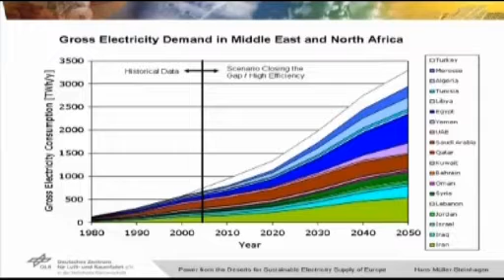Let's start with Middle East and North Africa. Don't even try to read the different countries, but believe me, we have done it for all of them. The important message is that electricity demand in the MENA countries will increase by a factor of 5 to 6 over the next 50 years, reaching roughly the level of electricity consumption Europe has already now. This is because of increase in population, but also increase of industrial activities and increase in the quality of life.

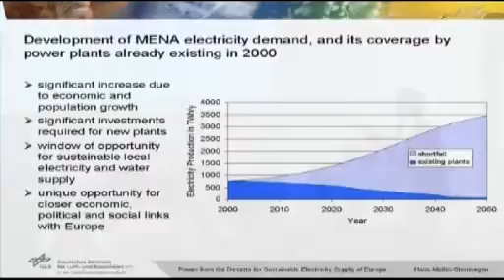Now, if we look at this, this is the same plot. That's the increase, and this is the capacity which can be produced by the existing power plants in 2000. These power plants will go out of operation over the next 30 years because of old age, and you see there's a tremendous gap that has to be fulfilled. That means there's a tremendous need to build new power plants in the Middle East and North Africa. This means investments, but also a potential to restructure the electricity market and to form closer economic, political, and social links with Europe.

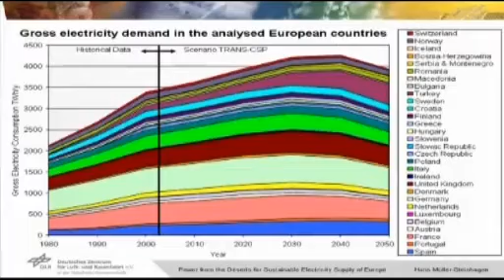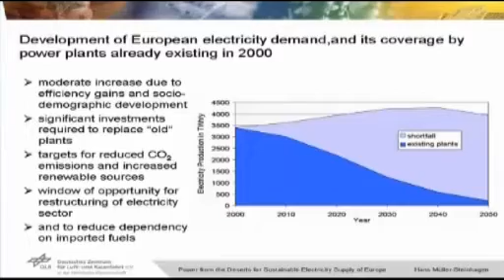Now, we could, of course, say well, this is not too bad, we will manage with this amount of electricity or increase in electricity generation. But this is not the case, because if we look at our present electricity production capacity, this is the dark blue area, then we see that in Europe we will have to replace roughly 60% of our existing power plants over the next 20 years because they just have reached the end of their economic and technical lifetime. So again, there is a tremendous need to build new power plants. In addition to this, we have our targets to reach the reduction of CO2 emissions, to increase the percentage of renewables in our complete electricity mix, and of course, to reduce our dependency on imported fuels.

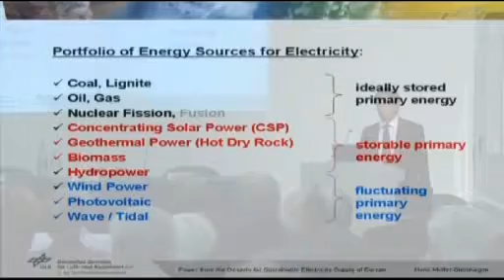So both areas, MENA and Europe, have to build a huge capacity of power plants, and the question is now, what power plants will this be, and how can we position this important area for the years to come? We looked at the whole portfolio of energy sources for production of electricity - here the conventional technologies. We didn't look at fusion because fusion power will, if ever, only become economically relevant later than 2050. We went up to 2050 in our scenarios and not further.

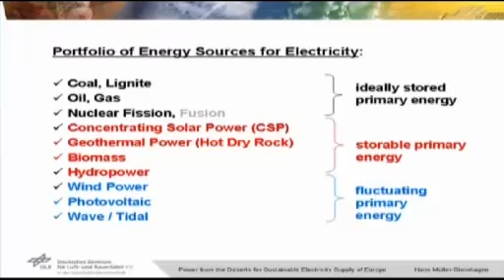We looked then at the storable renewables, and we looked at the fluctuating renewables like wind, photovoltaic, wave, and tidal. For each energy carrier and energy technology, we made a sustainability assessment and said they have to qualify in terms of affordability, security of supply, and compatibility. And if two technologies were equal in terms of availability and cost, then we always gave preference to the one which is more sustainable.

Now, if we look at our energy scenario, I don't think there is any doubt that we have to increase the percentage of renewable energies in the future. Even if there are discussions on the rate of doing this, on the other alternative technologies, I don't think there are many governments who would debate the need to increase the percentage of renewables. So we did an analysis with a 10 square kilometer resolution, 30 minutes over the whole year, on the potential of different renewables such as biomass, geothermal energy, wind, hydropower, and solar for Europe and for the MENA region.

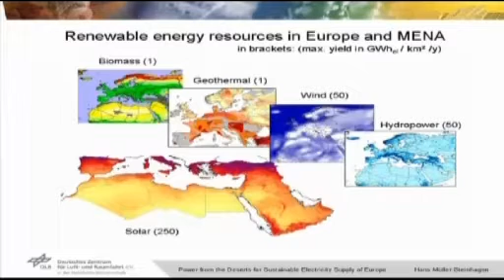As you can see, just for an example, wind has more potential where the blue is dark, so around England, of course, and in the coastal areas there is a significant potential for wind. You also get a fairly high energy density in terms of gigawatt hours electricity per year and square kilometers. Similar for biomass - there's, of course, in the Sahara Desert, no biomass, there's a lot more in Central Europe, and so on. And then we have solar energy, which has, surprisingly, the highest energy density of all renewables.

We then calculated from all the different forms of energy the economic renewable potential to generate electricity. The economic renewable potential means that within 30 to 40 years, at a given location, this electricity must be competitive with other forms like fossil fuels and electricity from fossil fuels. That will be different, for example, for solar in England than it would be in the Sahara Desert.

But we did this separately for every location, and we then looked at the demand on electricity. In the year 2000 it was 4,000 terawatt hours of electricity per year. This will be the demand of electricity in the year 2050. In EU and MENA, the doubling comes mainly from the Middle East and North Africa. And now we look at the economic potential of renewables.

Wind, biomass, geothermal, and hydropower together can deliver economically around 6,000 terawatt hours per year, so more than enough to supply present demand—75% of the demand in the year 2050.

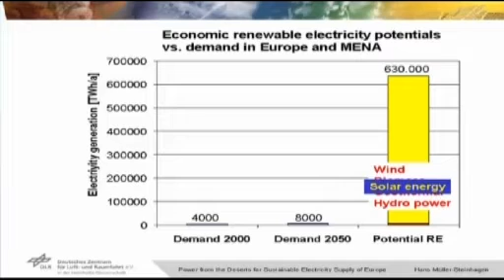Now, if we add solar to this, we see that the potential in Europe, Middle East, North Africa to generate economically electricity from renewables is about 150 times higher than the total electricity demand in Europe and MENA today, and still about 100 times higher than the future electricity demand.

Solar is by far the most abundant, and if we look at the size of an area which would be required for a gigantic solar thermal power plant which would supply the whole electricity of the world, this would be 1% of the Sahara Desert. Of course, nobody will build just one single gigantic power plant. That's not the idea. It's really just to show we are not talking about plastering the world with solar power plants, mirrors, photovoltaics, or whatever.

This is the area for the EU 25, about 150 by 150 kilometers square. And that would be the solar power plant for 100% German electricity supply.

Another example: if we would build a solar thermal power plant with the area of Lake Nasser, this would generate enough electricity—the same amount of energy as the whole oil production of the Middle East together.

Now, how is this electricity to be generated? We believe for these power plants in North Africa, the Middle East, and maybe Southern Europe, it will not be photovoltaics, which serves as decentralized electricity generation, but for these large power plants, it will be solar thermal power plants. Let me explain how they work and why I think they should be given preference for these applications, not for many others.

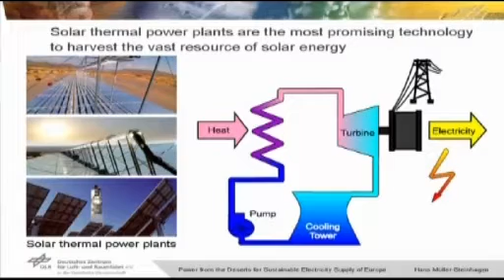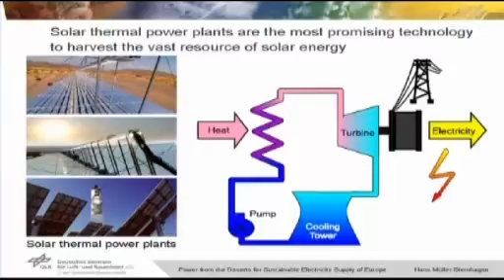And here we have the three main technologies. These are flat mirrors, a so-called Fresnel type of system, where the flat mirrors follow the sun during the day. We have these parabolic trough systems, which follow the sun from morning to night and focus the sunshine about 80 to 100 times on a horizontal absorber tube. And we have so-called power tower or solar tower systems, with almost flat mirrors following the sun and focusing it up to 1,000 times on the top of a tower, where you reach temperatures up to 1,000 degrees.

What's the advantage? First of all, these systems can be readily integrated into conventional thermal power plants, which we know well—companies already have a lot of expertise building conventional gas turbine and steam turbine power plants. It can be used to provide firm capacity, because you can combine it with heat storage and supply electricity even when the sun is not shining, or use a fossil backup, firing gas, coal, or oil when the sun is not shining. It can serve different markets like bulk power, remote power, but also desalination.

It already has the lowest cost of solar electricity, and the energy payback time—the time to generate as much electricity as the energy needed to build the plant in the first place—is only 6 to 12 months. And it's a proven technology with an industrial base.

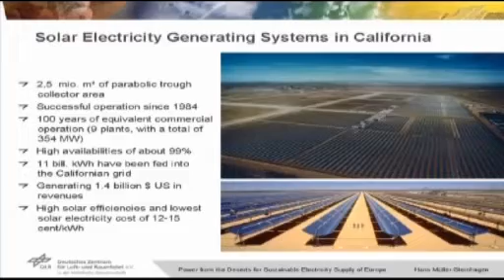These power plants are not new. About 25 years ago, 9 solar thermal power plants with a total capacity of 350 megawatts were built in the Californian Mojave Desert and have been operating since. They are still working. We checked some of their mirrors and absorber tubes just 3 years ago. There's no sign of wear or decrease in the reflectivity of the mirrors or the absorptivity of the tubes. These power plants have generated $1.4 billion US in revenues, have fed 11 billion kilowatt hours into the Californian grid.

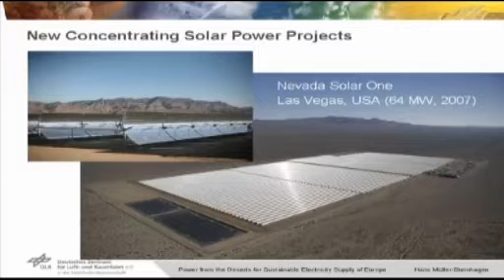and have now levelized electricity costs of around 12 to 15 cents per kilowatt hour. Since then, there have been new power plants which have been built and taken into operation. What you see here is a 64 megawatt power plant near Las Vegas, taken into operation in 2007.

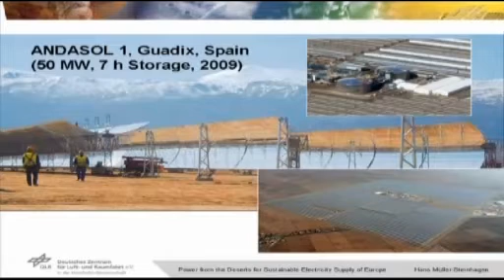One is just taken into operation. It's the 50 megawatt solar thermal power plant, a solar parabolic trough plant near Granada in Spain. The interesting thing here are these 2 big tanks, which are heat storage that allow this plant to operate for 7 hours after sunset, or whenever the sun is not shining, to bridge this gap. And with this, they have about 4,000 full load hours per year.

I have a small video. This is in German, I apologize for this, but I just wanted to show you some impressions from this power plant. It's about 2 square kilometers of area, 550,000 square meters of parabolic mirrors, and about 100 kilometers of absorber tubes. As you can see here, we are really talking large-scale engineering.

This is a lot of civil and mechanical engineering, and it's connected to a conventional power plant. Here we saw the two large tanks again, which act as heat storage.

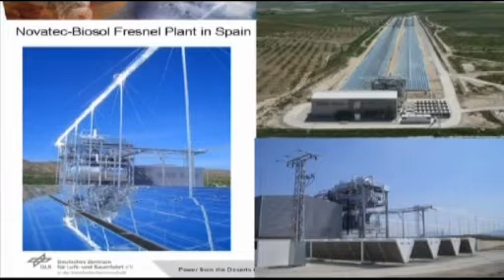This is another plant that has just gone into operation in Spain. It's a Fresnel plant with flat mirrors, and this one uses an air-cooled condenser, so it doesn't need cooling water at all. It's a very promising technology in terms of cost reduction, but it's still at a much smaller scale - only 1.5 megawatt.

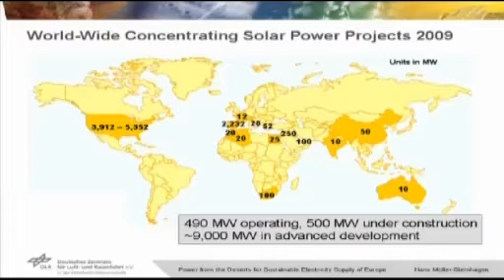And if we look at this worldwide, then we see it's on a much larger scale. There are about 5 gigawatts of capacity under advanced development in the US. There is some activity in Australia, South Africa, North Africa, China, India, and a lot, of course, in Spain, some in Italy and Greece as well. So in total, we have about 9,000 megawatts, or 9 gigawatts, of solar thermal power plants in the pipeline.

Reality will probably indicate that this increase will be much steeper, but I'm not going to do any calculations which give us a result where people could say he just assumes fossil fuel is getting exceedingly expensive.

The first solar thermal power plants in California were much more expensive than conventional electricity, but costs went down significantly, and then nothing happened for 20 years. Why? Because fossil fuel got so cheap that nobody was building any alternative technologies. I remember oil being less than $10 per barrel, and coal and gas similar.

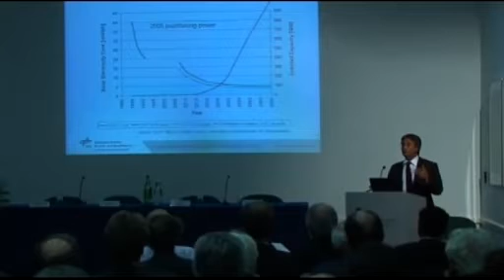Suddenly, all over the world, building activities started again, industry got interested, and the predictions from learning curves and from the relevant industry, the companies involved in building, planning, constructing these plants, are that roughly 10 to 15 years from now, this technology will be cost competitive with mid-load electricity from fossil fuels, including oil and coal if the CO2 is removed and stored underground.

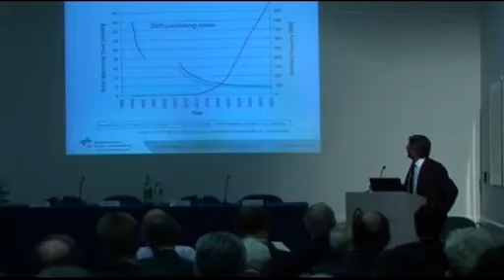Now what we have here is the capacity of installed plants, which is at the moment still very low. It's increasing - I've shown you the 10 gigawatt in the pipeline. But once this technology is less expensive than electricity from conventional plants, more and more of these solar thermal plants will be built, because the costs are predictable, and because the electricity is not getting more expensive - sunshine for the next 5 billion years will be available at no cost to everybody.

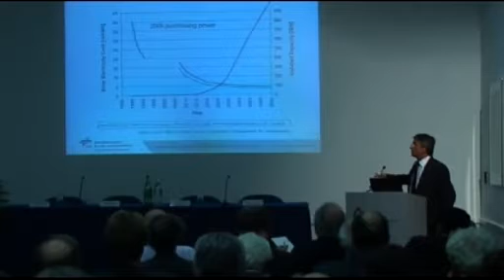And so this will mean that a lot of the new power plants which will have to be built will become solar thermal power plants in those areas where this is possible.

Why am I so confident that we will be able to get the cost down? This is a question I always get asked. The first reason is with increasing construction and building activities, we get a mass effect - mass production. More and more identical power plants will be built, not like now where every power plant is totally a first. The second is that these power plants will become bigger.

At the moment, the maximum size is around 50 megawatt, but in the US already, the Spanish company Abengoa has received an order for a 280 megawatt solar thermal power plant, meaning you only need one power block and you just have more mirrors around it.

But there's also a lot of technology development in the pipeline which has been developed over the past 20 years. The first is the so-called direct steam generation, where my institute and the Spanish research center CIEMAT have been working for the past 20 years.

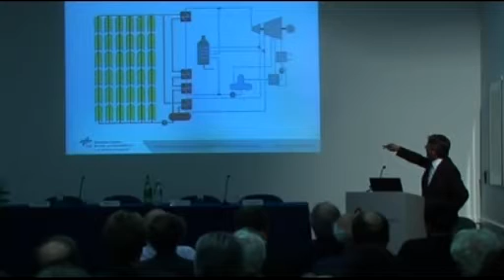Now this is a typical parabolic trough plant. We have oil as a heat transfer medium. The oil is pumped through the horizontal pipes, the absorber tubes, which are based in the focus of these parabolic mirrors, and it's heated from say 300 degrees to 400 degrees, and then this hot oil is used in steam generators to heat water to boiling temperature, evaporate it, superheat it, and then pass it through a two-stage steam turbine, the condenser again, and so on.

Now the next step will be to replace the heat transfer oil by water and evaporate the water directly in the absorber tubes. As you can see here, we save a lot of hardware, we save the steam generators, and we can go to higher temperatures because the oil is limited to about 400 degrees, even though it's a synthetic oil which costs a fortune.

Now this sounds simple, it's not. And Geoff Hewitt will agree with me - having two-phase flow through about 100 parallel channels, each channel being 800 meters long, and to control this and come out here with superheated steam, even if a cloud comes across it, is not trivial. We have pilot facilities in Spain.

We have had about 15 PhD theses. We can do this now. We can control it. We can predict it. And we are now in the process of setting up a pilot facility with 3 to 5 of these parallel streams, each of them being 2 megawatt thermal, to demonstrate that this works, and then it's ready for installation. This will reduce the investment cost or the electricity generating cost by roughly 15%, just because of the higher temperature and the less hardware.

That's one thing. The next thing is solar gas turbine, steam turbine cycles.

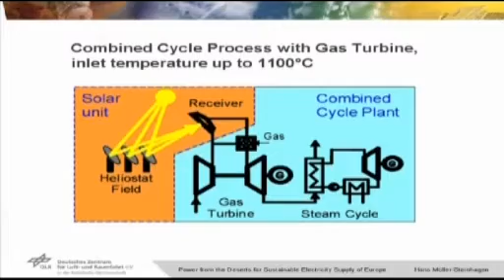Probably all of you or most of you would know that the highest-efficiency conventional power plant cycle is a combined cycle plant, where we have a gas turbine and the air is compressed, heated to 1,000 degrees by burning gas, then expands in the turbine, drives the generator, and the hot exhaust gas is used to raise steam, which is then expanded in a steam turbine to raise electricity.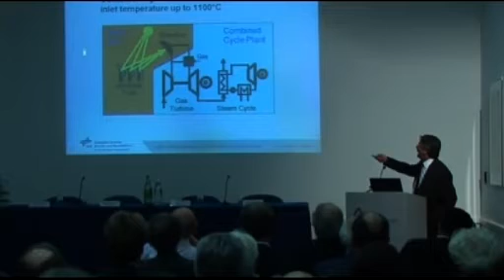Now the same cycle can be realized with a solar power plant where we have a solar tower and the heliostats, and we use solar energy instead of gas, or together with gas if the sun is not shining, to drive the gas turbine. And that gives us efficiencies of up to 35%, meaning we need less mirrors, which make 40% of the investment cost, for the same amount of electricity. And again, this has been developed and demonstrated in the last 10 years.

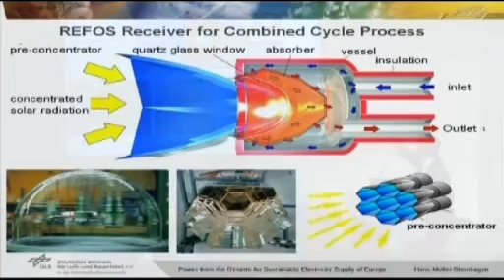What you see here is one single absorber which would be sitting on top of a tower. This is only for about 400 kilowatts. There will be many of those, and the air comes in here under pressure, moves here through a ceramic sponge, is heated to up to 1,000 degrees, and leaves then here with 5 to 10 bar pressure and 1,000 degrees to go into the gas turbine. And there are a few tricky bits like this glass here, which can only take up to 600 degrees, even though we reach 1,000 back here.

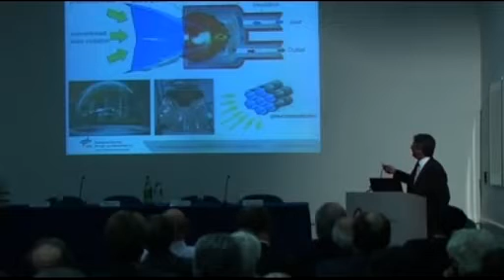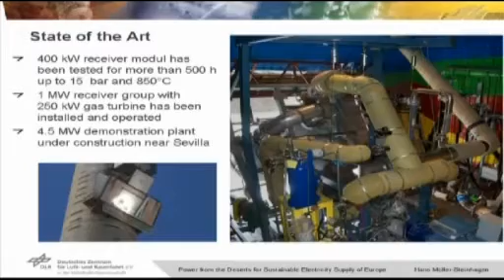But we have demonstrated this in the tower in Almeria in Spain with 3 of those receivers. They sit here, and the actual gas turbine is this small thing down here running at 250 kilowatts. And we are presently, together with some companies like Abengoa, MAN, and Endesa, building a demonstrator at 4.5 megawatts near Sevilla in Spain.

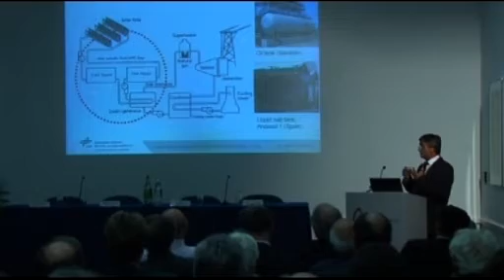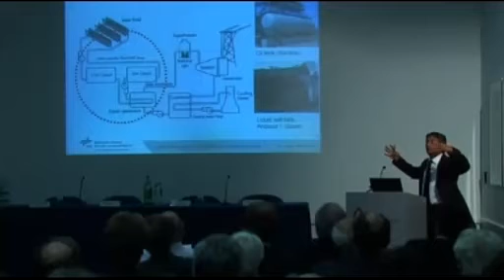The third reason why I believe in the potential of solar thermal is the ability to store energy. Photovoltaics and wind may become cheaper than this technology, but they only produce electricity when the sun is shining or the wind is blowing, which means it's relatively low-grade electricity which will be there or it will not be there, just depending on the weather conditions, and certainly not after sunset in terms of photovoltaic. Solar thermal has the advantage you store heat. That means the excess heat that you don't need in the afternoon, you store, and then you withdraw it from a heat storage like this oil tank or this liquid salt tank to generate steam after sunset.

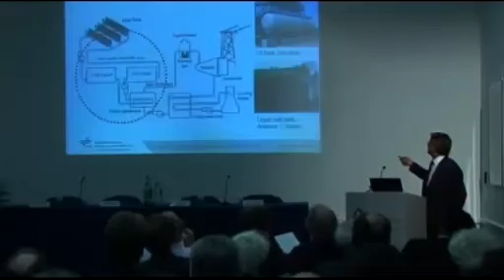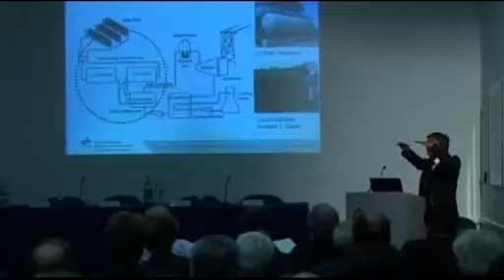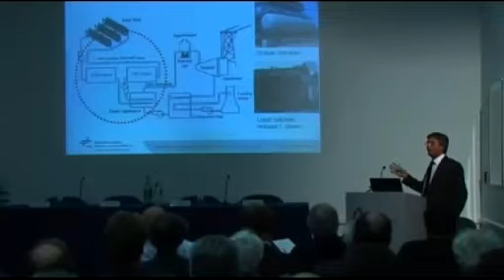Now, this is the existing technology. It works in Spain, but it's not trivial and it's not terribly elegant. It's two large tanks, 36 meters diameter, 15 meters tall. In this tank is about 25,000 tons of a liquid salt. It's a sodium nitrate, potassium nitrate mixture which melts around 180 degrees, but which stays liquid. And you heat it during the day to 400 degrees, and at night you cool it down again to 250 degrees, and you use the resulting energy to raise steam to run the power block. The cost of this is, for a 50 megawatt plant, around 30 million euro for the salt and for the tank.

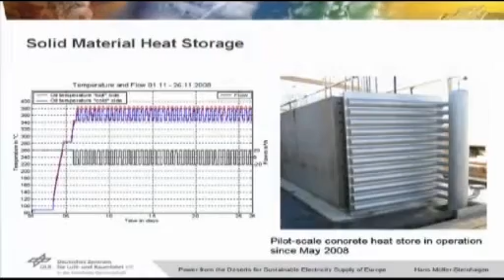We have since developed a new technology together with a large civil engineering company, and that's a concrete heat storage. We developed together with them a special concrete which has a lot of beneficial properties, which I don't want to mention in detail now, you can ask later. And this concrete heat storage is heated during the day with excess heat to 450 or 500 degrees, and then it's cooled down again, and the sensible heat is used to raise the steam. So it's the same as the liquid salt. The only difference is this is 40% less investment cost than the molten salt. And that means about 20 million instead of 30 million investment. And we have been running this since May last year continuously through cycles, and there's no degradation, no deterioration in this, and we just keep it running.

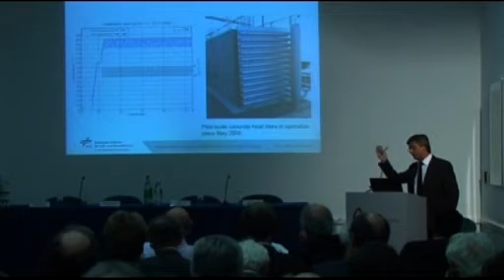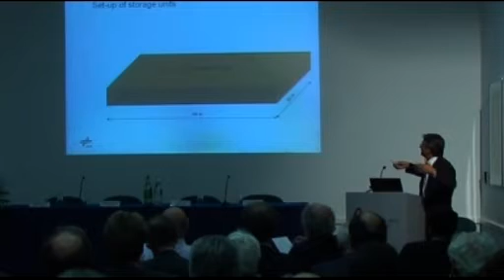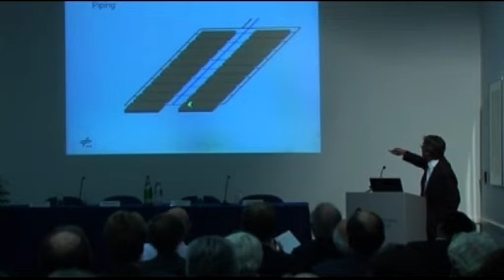And this is how it's going to look on a large scale. We will have about 20 of those concrete blocks together to form one package, which is then insulated on the outside against heat losses. And we will have a number of these blocks together, then connected through pipes like this. And here, during the daytime, the hot oil comes in, heats up the concrete blocks, and leaves at a lower temperature. And at night, it will just be the other way around. The cold oil comes in, is heated up, comes out hot.

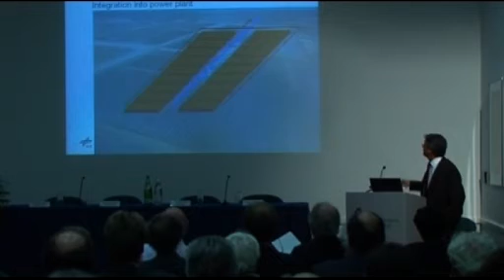This sounds like a fairly big thing. It is. But if you look at it, this is a solar thermal power plant in California. And this is the area required for the concrete heat storage. We need about 50,000 cubic meters of concrete for a 6-hour storage for a 50 megawatt power plant. That's 6 hours full load electricity.

Now, this is already a big step forward, but it's still not as elegant and effective as we want to have it, because if you produce steam, steam evaporates at a constant temperature. If you do this evaporation with sensible heat transfer, your exergy losses are dramatic, because you have to start with a much higher temperature than the boiling temperature, and then the concrete blocks go down in temperature, and so you lose the exergy at the beginning.

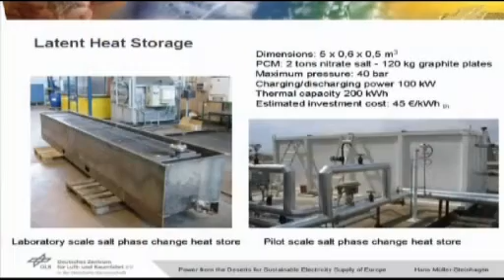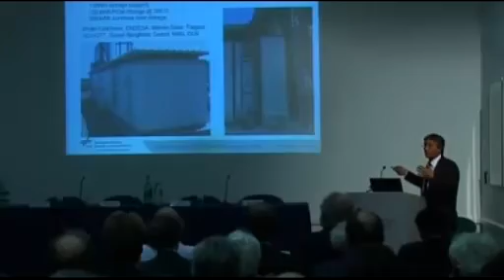So we have developed a latent heat storage where we melt and solidify the salt and use the heat of solidification. And that's what we have here, lab scale, pilot scale. And at the moment we are setting up, together with an industrial consortium in the south of Spain, a unit which consists of a concrete heat store for preheating the water to boiling temperature, a latent heat store for evaporating it, and another concrete heat storage for superheating it.

Now, where are these power plants going to be built? And this is one of the nice things. This is an advantage if you work for the German Aerospace Center, because we have access to satellite data without end. We have satellite data for the surface of the Earth for the past 25 years, 3 square kilometer resolution, 30-minute time intervals, cloud coverage, aerosols, water vapor in the atmosphere.

And from these data, we can calculate the direct radiation for any spot on the Earth at any time of the year, averaged over 25 years. So we really don't depend on a good year or a bad year. We can say this is what it's going to be in average on June the 13th at 2 o'clock in the afternoon, for example. Now with this data and our models for the whole system, we can calculate the generated electricity at a given location, again, over the year and time.

And if we then combine this with geographic information data on the slope, we filter out everything where there's not enough flat land to build a solar power plant. We filter out all the type of land which is not suitable, cities, agriculture, military security zones, sand, water, everything that's not suitable. Then we end up with the area where actually those solar thermal power plants can be built.

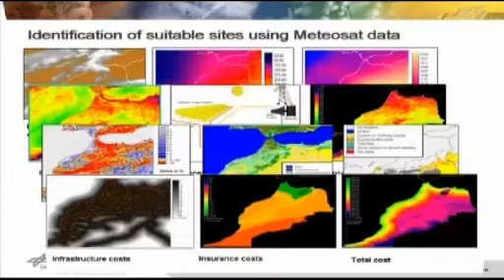And we combine this with infrastructure costs, available roads, available power lines, insurance costs like danger of tsunami, to get the total cost of electricity generation. And this then allows us locally to do a ranking of sites. This is, for example, Spain. Only the white areas here are suitable for solar thermal power plants. All the other areas are excluded for whatever reasons.

And if we then combine, now this is just changed in color, everything which is white here is not white here, then we can see the most suitable sites in terms of ranking, like down here. That's the sites where in Spain we can build with today's technology the most effective solar thermal power plant, and the more it moves to red or darker, the more expensive the electricity will be. And we can do this for the whole world.

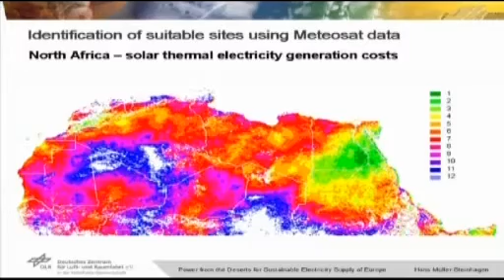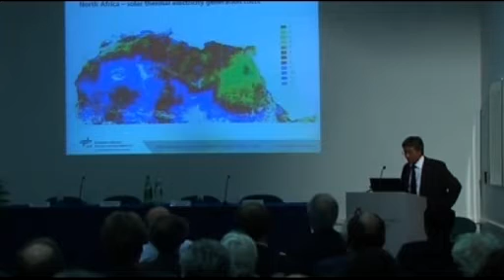This is the north of Africa. The cheapest areas are here, Egypt or Morocco here, and it gets more expensive as we move inland because the condensers have to be cooled by air rather than by cooling water. Now, everything that's green here are areas theoretically suitable for solar thermal power plants. This looks wonderful, doesn't it? Unfortunately, life is never that easy.

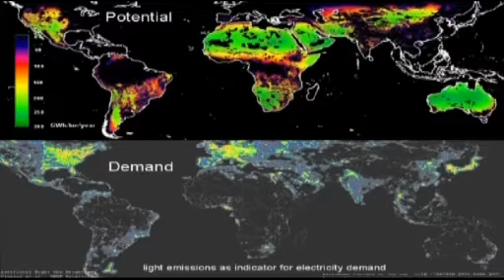This is a picture of the world at night from satellites, and all the green areas are areas where you have a lot of light at night. And if I just equate the demand for light with the demand for electricity, you see the areas where we have a lot of demand for electricity. We don't have a lot of sunshine for solar power plants there, and the areas where we have a lot of potential for solar thermal power plants, we don't really need that much electricity. So we don't really have an energy problem, we have an energy distribution problem. And how do we solve this?

30 years ago, my predecessors suggested to build electrolysis plants in North Africa, use solar thermal electricity, generate hydrogen, transport it to Europe, and use fuel cells. Now you lose 75% of the energy doing this, and the costs of the fuel cells are even today excessive.

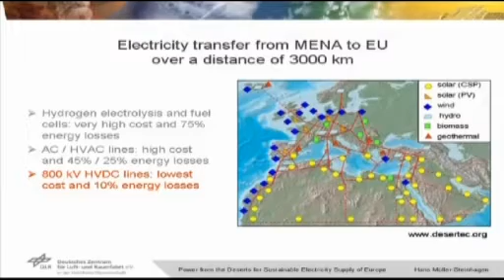Second option, alternating current lines with the normal current, 380 kilovolts or 800 kilovolts. You only lose 45 to 25%, but that's still excessive. The solution will be high voltage direct current lines, where you only lose 10% of the electricity over 3,000 kilometers from the north of Africa all the way to Europe. And this is again proven technology.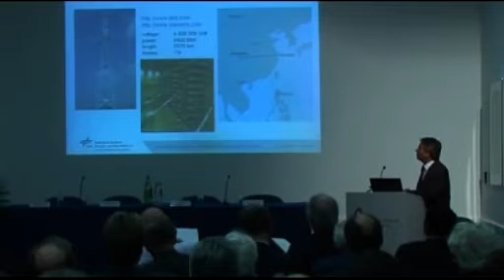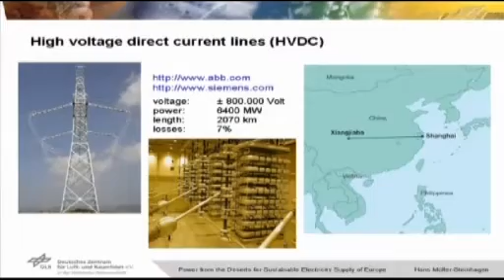There are about 100 high voltage direct current lines already in operation worldwide, and Siemens and ABB are presently building a 2,000 kilometer line for 6.4 gigawatt capacity within China, with losses over this distance of only 7%, including the losses occurring when you go from AC to DC and back to AC.

And clearly, the difference between the red bars and the dark gray bars are new power plant capacities which have to be installed and built. This will initially be done in the next years to come by building new conventional power plants. Gas, oil, maybe coal, maybe nuclear. But there will also be the first solar thermal power plants. Power plants are at the moment already under construction.

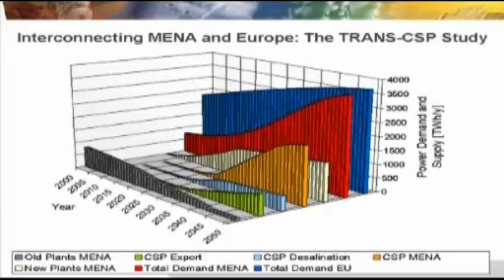And once these power plants produce electricity cheaper than the conventional power plants, one will increasingly build in North Africa and the Middle East the solar thermal power plants, just because one saves money and one saves fossil fuels which can be exported. So that's the capacity increase, and most of this capacity will be used for their own electricity consumption plus additional desalination plants, because water is going to be the main problem in these countries.

Already today in Yemen, in Sana'a, the water table drops 6 meters per year. Egypt will need the water of a second Nile in 30 years. And there will be no natural second Nile. It has to be desalination, which in the Mediterranean is done using reverse osmosis driven by electricity.

And from 2025 onward, one can envisage the first electricity exports over the Mediterranean into Europe, reaching roughly a capacity of 100 gigawatts in 2050, which makes about 15% of the European electricity consumption. And this is how this looks in terms of numbers.

In 2050, one could envisage having 20 high voltage direct current lines from different positions crossing the Mediterranean, like going through Spain or through Sardinia and Italy, or around Egypt and Istanbul into Eastern Europe, providing electricity of around 7,000 hours per year with heat storage at a cost of 6 to 8 cents per kilowatt hour in today's electricity costs. This will be inflated, of course, like everything else, which is similar to a coal power plant with CO2 sequestration.

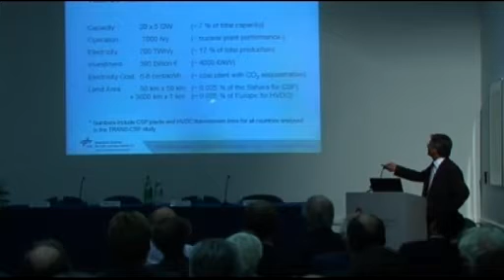The area required for this is 50 kilometers times 50 kilometers, or 0.025% of the Sahara area, plus the area required for the power lines in Europe. And the cost for this would be roughly 400 billion euro, which is the cost of the Desertec project, which is publicized at the moment ever so often.

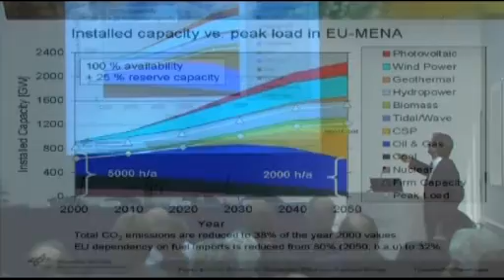And how would this look in a total mix? That is a scenario for Europe and the Middle East and North Africa, which would achieve our CO2 reduction targets by the year 2050, and which would make a large use of renewables. What we have here, the diamonds, is the peak power that's required at the moment, or which is predicted for 2050. So the maximum electricity demand at any time in the year.

We say we always want to have 20%, 25% reserve capacity, which is common practice today. So these are the triangles. This is what we have to be able to provide at any time. And this will be provided by a mix of energy technologies. First of all, we have the fossil: oil, gas, coal, nuclear.

Then we have the fluctuating renewables, photovoltaics, wind. And then we have the storable or dispatchable renewables such as solar thermal and biomass and geothermal. And what we say is when we have the local fluctuating electricity available, it will be fed into the grid preferentially.

The whole scenario will then look like this. Today, fossil power plants or conventional power plants are operating an average of 5,000 hours per year, including the peaking plants which provide peak electricity or mid-load electricity.

In 2050, this would go down to 2,000 hours per year. That means fossil power plants will almost exclusively be used to provide peak power when the fluctuating renewables and the storable or dispatchable renewables are not able to provide enough electricity.

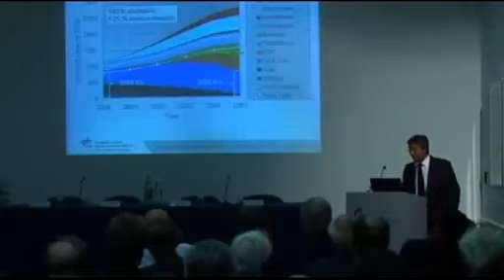From this solar thermal electricity, that's the amount that will be exported from Africa to Europe, and this is the amount used within Africa and the Middle East. This system will reduce CO2 emissions to 38% of the year 2000 values, and it will also reduce EU fuel imports for electricity generation from 80%, as the business as usual case for 2050 would be, to 32%.

So let me come to some conclusions. In 15 to 20 years, it may be possible to realize an electricity supply which is both less expensive and significantly more environmentally friendly than the present technology mix.

The increased use of local renewable energy sources will reduce the dependency on imported energy carriers. Solar thermal power plants in the MENA region will make a significant contribution to this, and there is no competition between photovoltaics, wind, and solar thermal power plants.

On the contrary, there's a synergy because the increased contribution of solar thermal, which is dispatchable and plannable, allows us to use the fluctuating renewables to a much higher percentage.

On 13th of July this year, the so-called Desertec Industrial Initiative was established, which has the aim of providing 15% of the European electricity from renewables originating from the MENA region by the year 2050.

This industrial initiative at the moment consists of 12 major companies. I think 2 or 3 of them are represented here even tonight. It has already 8 additional companies which have signed but are not to be named yet. The aim, of course, is to make this a truly European and MENA activity rather than just one originating from a small number of companies.